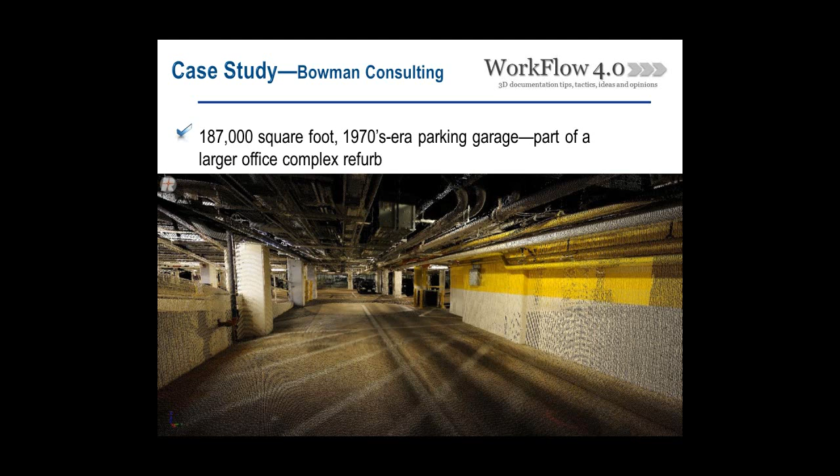Moving on to this next slide with a parking structure in particular, you'll see a project that was about 187,000 square feet, 2 levels of parking. A lot of the work here up in Northern Virginia is refurb work. Contractors and architects team together and hire folks like us to help them tie their new design to an existing condition, and with the Revit product out there, that's becoming our conventional deliverable at this point.

With this project, MEP was of prime importance as ceiling heights and ramps were going to be changed. So the quick statistics on the project: we had a couple of folks out there, 78 scans over 3 days. The Riegl VZ400 with the photography has always met our expectations time and time again. It's a durable instrument and works real nicely with these types of products like ClearEdge.

The old way we would do this, right now we're looking at that point cloud with the photos. The old way would be to bring that into a CAD application and model that piping - scan to CAD - then export that to get into Revit. We would lose all that modeling and just get the center line, and we'd end up modeling that all over again in Revit. That became particularly difficult and a budget killer when the project started off as a CAD deliverable, but then the architect in the 11th hour wanted a Revit deliverable.

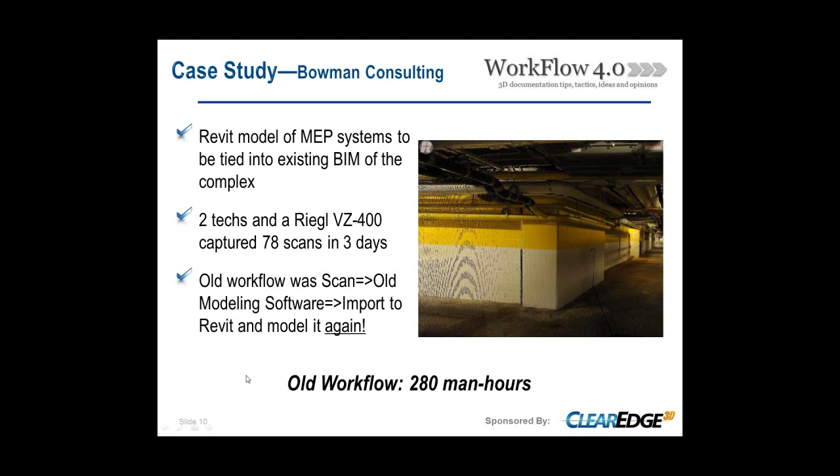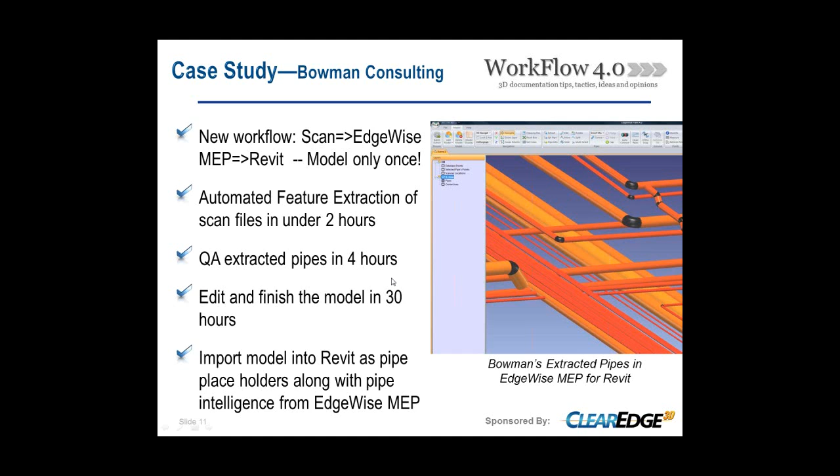So not wanting to hear the explanation that we'd have to remodel it and kill the budget, with this new ClearEdge product I couldn't be more excited about what I've seen so far on this recent project. You can see some of the statistics up there on the screen - basically we were able to import our auto-extracted pipes into Revit directly and proceed right into our final deliverable, about a six-time efficiency enhancement. I know we got a lot of ground to cover here, so I'd be happy to take questions at the end of this webinar.

Here's a quick example that shows some of the piping that was auto-extracted and modeled, and you can see it's inside Revit. It was a one-step process as opposed to a 3-step process. So again, I'm very excited about this new development, and I'd be happy to share our experiences with anybody on the call.

Hey Mike, appreciate that. The slide on screen right now kind of summarizes everything about the time savings that you all had - 42 hours in the new workflow versus 280 in the old one. That kind of says it all, doesn't it, Mike? It does, and those are real numbers. I was very happy from a budget management standpoint on this one.

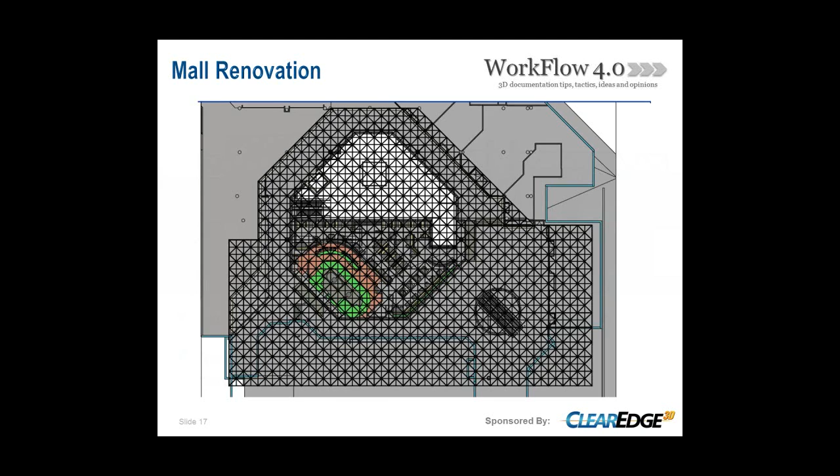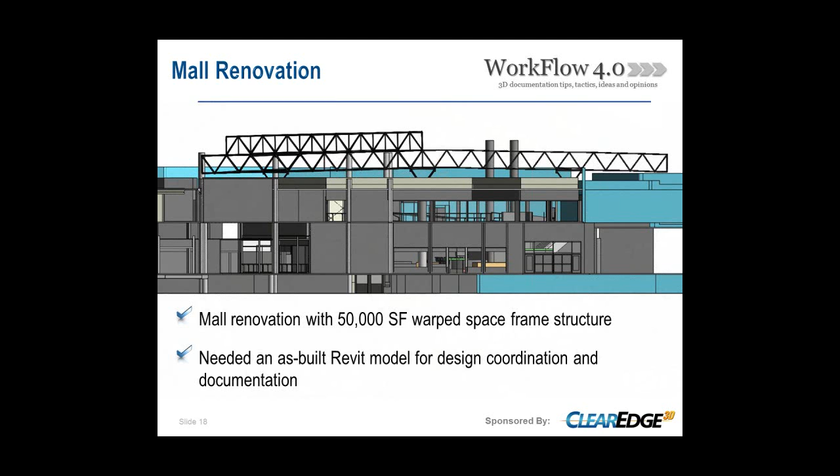All right, so this was just to run through our first pass at this, going on at the same time that I sent the PCG file to Kevin. We ran through, took about 80 man-hours to manually draw the entire space frame, and we did it using an adaptive component, which allowed us to move through much quicker than if we had used the out-of-the-box structural framing that comes with Revit. So 80 man-hours is really about as fast as it can be done in Revit.

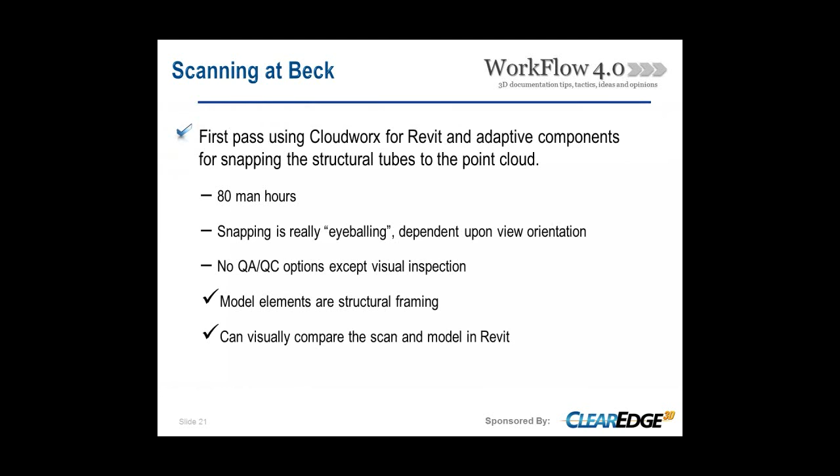There are some potential issues with this method - we're really kind of eyeballing in Revit to match it up to the scan. It's not perfect by any means, but you can see from the images we did a pretty good job of it. So there are some QA/QC potential issues with this process, but there are some upsides though. The model elements are at least structural framing category, which is good for documentation, and we can visually compare the scan and the model, which is always good for us.

The thing we're trying to work out right now, workflow-wise, is whether it's better for us to clean all that up and get everything connected in EdgeWise, or to just bring the raw export into Revit and clean everything up in Revit. I don't really have an answer right now - I think we're looking at doing it both ways and tracking hours still. But regardless of which way, we think it's going to take us roughly an additional 8 hours to complete this, and that's a pretty dramatic reduction from 80 hours for us.

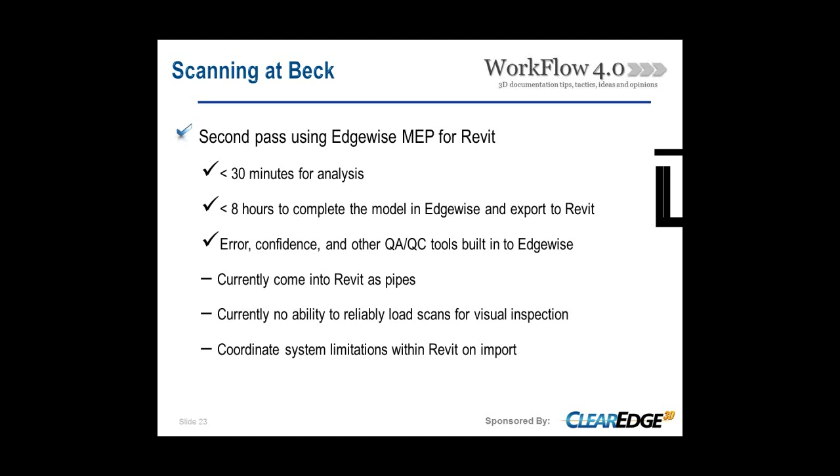And we get all the benefit of the QA/QC tools that come built into EdgeWise for MEP for all these pipes, which is something we don't get out of the Revit process. But we do have a couple things that pop up that Kevin's working on, and I'll let him talk about that in his demo. Right now, everything is coming into Revit as pipes, which is a challenge for us if we're trying to use these for analysis. And we don't really get to see the laser scan superimposed on the pipes in Revit because there are some issues with bringing them in and having them line up right now with how Revit handles coordinate systems.

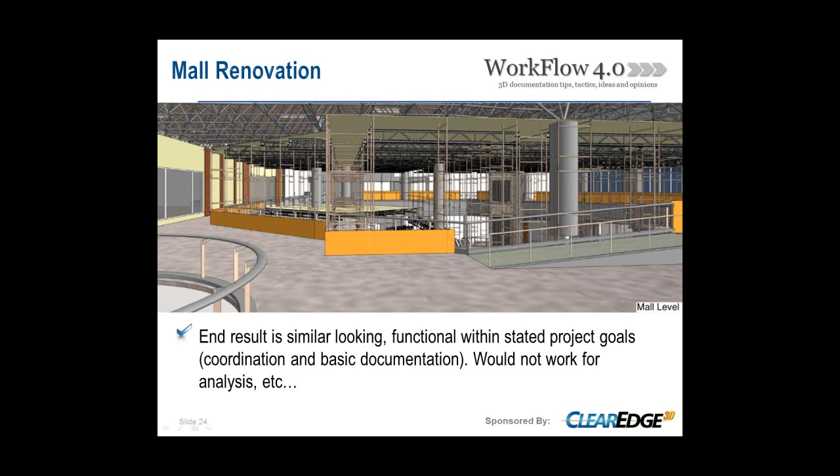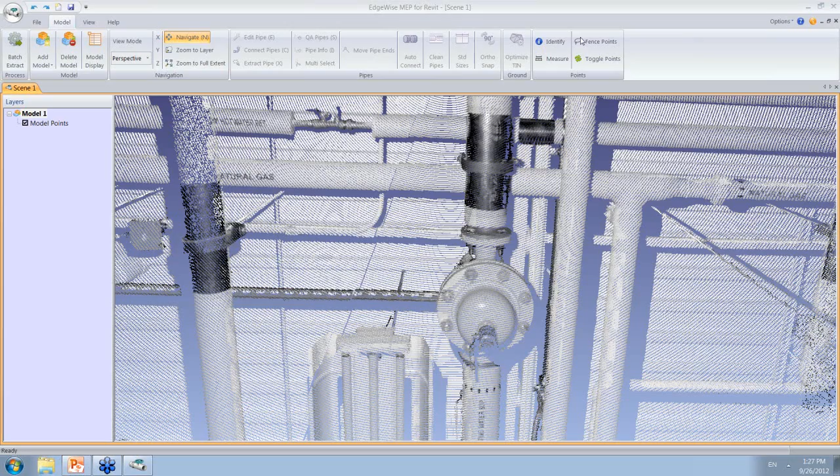Okay, excellent. I'm going to assume most of you are already somewhat familiar with how EdgeWise processes pipe models, so I'll go over the EdgeWise component fairly briefly so we can get to the Revit integration, which I think you're most interested in at this stage.

But I will give you a quick overview of how EdgeWise works. I'm inside EdgeWise right now, looking at a small single scan of a small MEP room. This will give you a good flavor for what the workflow looks like.

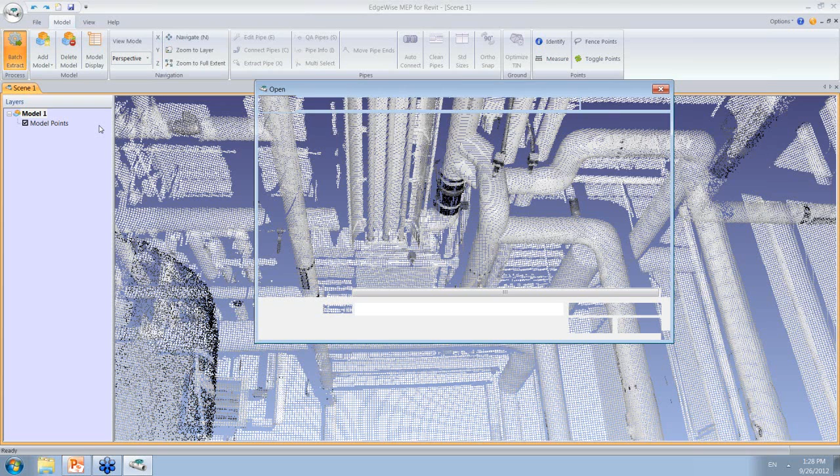The real magic of EdgeWise lies in this functionality right here. I'm going to process this scan and use automated feature extraction technology to analyze the points and find regions of cylindrically shaped clusters of points. The software will automatically detect those and extract pipes, doing a least squares best fit of a cylinder to those regions of points.

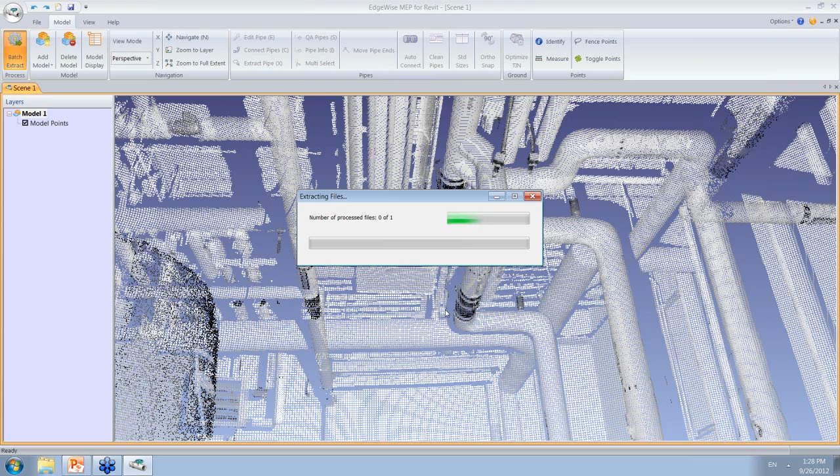So the idea behind all of our technology is we want to get the computer to do as much of the heavy lifting, the manual, tedious stuff, as possible, and let your CAD technician do what he does best, which is analyze the data and make intelligent decisions on the more complex portions of the modeling.

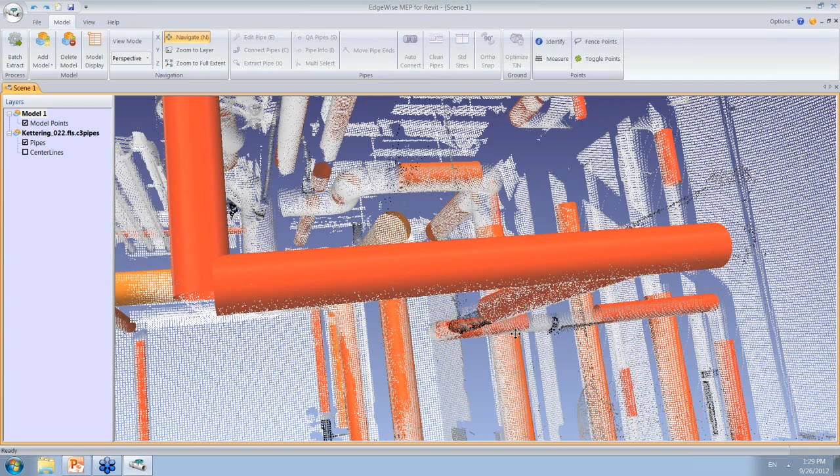So the software processed this file. Let me add in the model that it just created. All right, so these are the pipes that the software automatically detected, and you can see that it got most of the pipes, but you can find some missed regions of pipes in this data set.

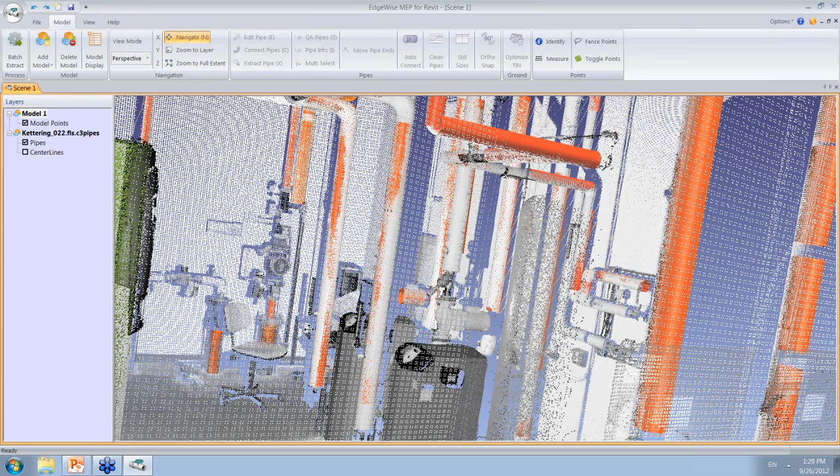Now, what we found out early on was that automation is never 100% perfect, so you've got to have an efficient way to go through and QA the data set to make sure it extracted things correctly, and make sure you don't have any bad pipes. For instance, I just found it here - I know in this data set it extracts a ladder rung as a pipe, and that's obviously incorrect.

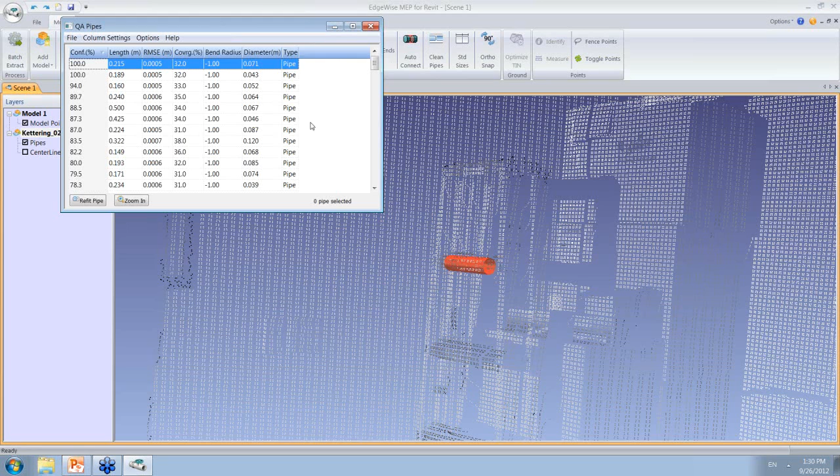So we spent a significant amount of time building a fairly sophisticated set of QA tools for analyzing these pipes, and we've incorporated them all into our EdgeWise technology here. This allows you to query each pipe - let me zoom out a little bit and turn off the point cloud so we can see more clearly what's going on.

If I query one of these pipes, it gives me a whole bunch of information. It tells me the length, the diameter of the pipe, the root mean squared error of the fit, the amount of coverage of the point cloud around that pipe. So it tells me a lot of information about that pipe.

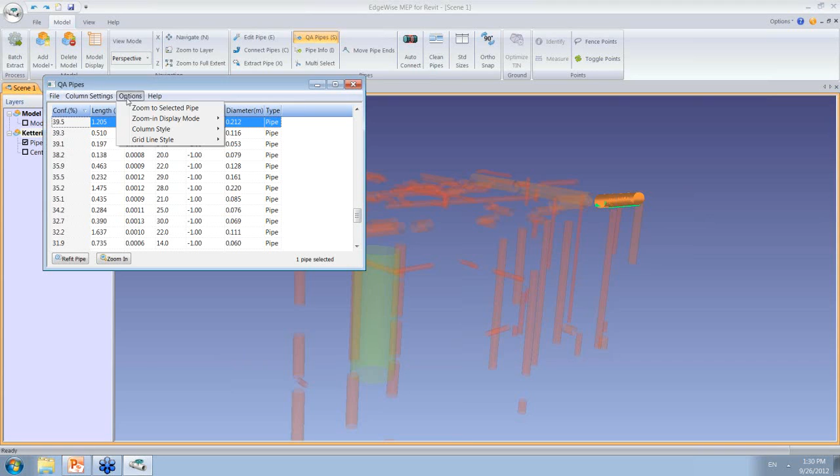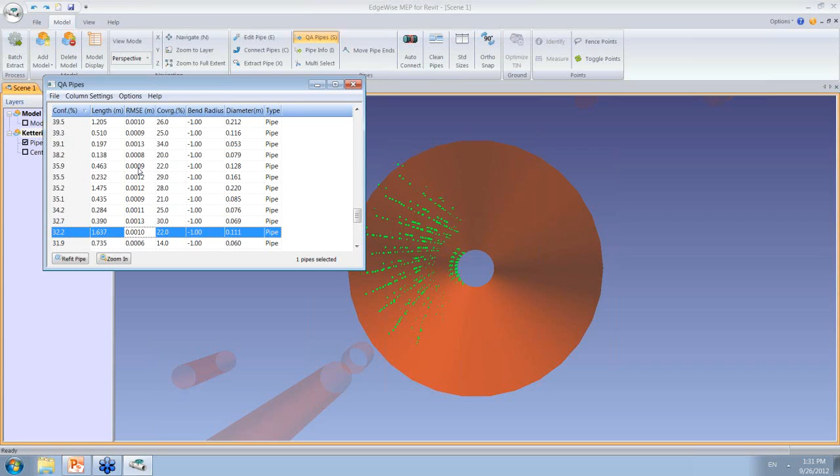Additionally, if I turn on the inspection mode, I can click on each of these lines in the spreadsheet and it will jump me to each of these pipes individually. If I rotate around, you can see the points that were used to fit that pipe, and it'll jump me to the next pipe. You can just cycle through on your keyboard and within a couple minutes verify each of the pipes in your data set so you can make sure you're working with accurate data.

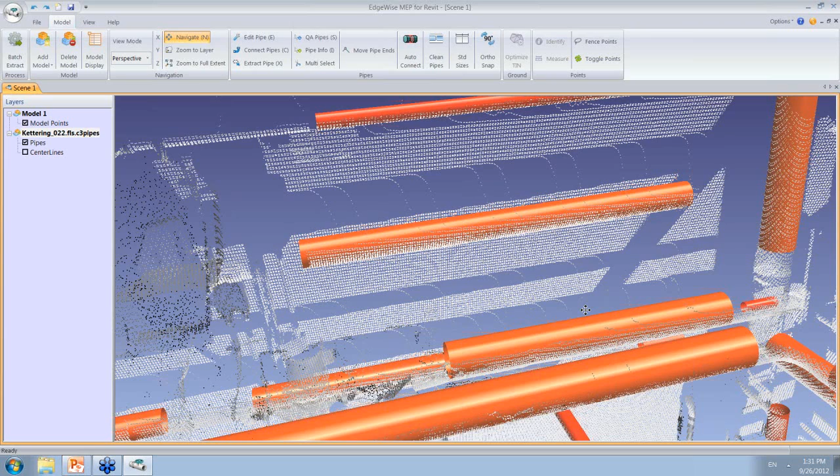All right, the next step in making a complete pipe model is capturing any missed pipes from the automated extraction process. Again, we've really refined the tools to enable you to go through and do this quickly and easily.

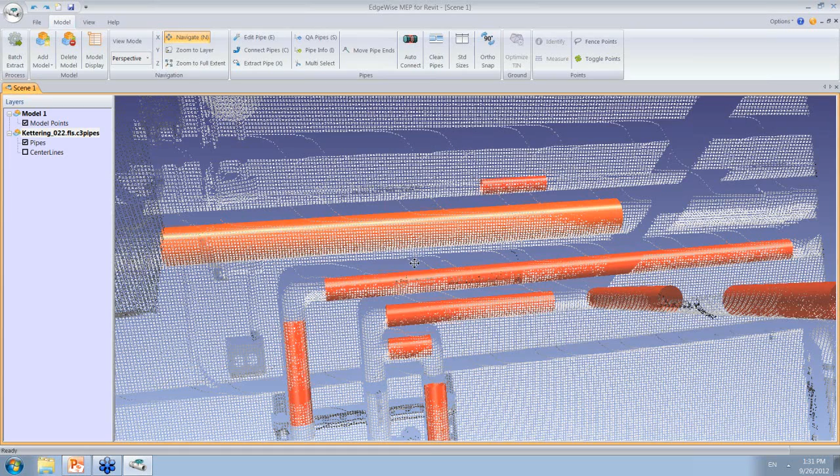So we have some really fast and easy tools to allow you to select a portion of points that should belong to a pipe and extract them. You don't have to go through and clean up the point cloud to make sure you're just selecting the correct points that fall on the pipe. You can just visually, very quickly, go through and grab the points that you see, and it will make a pipe.

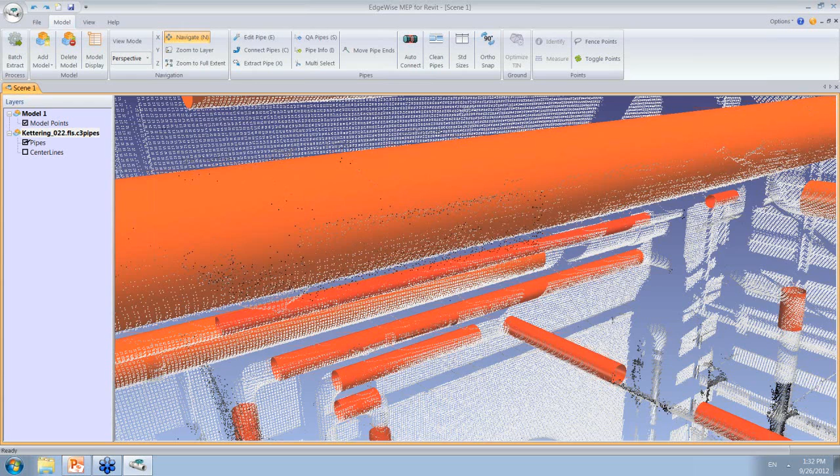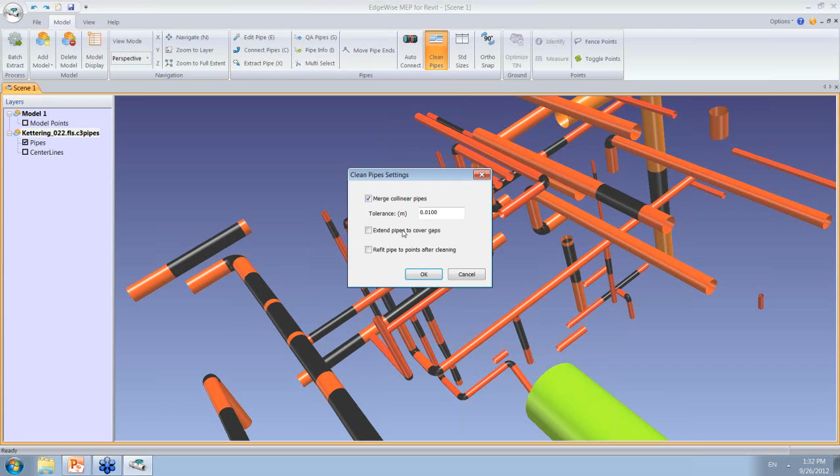So that's the workflow. Once you're satisfied that you've got most of the pipes, you can next do an auto connection routine. I'm going to adjust this so it only gets the most confident connections. You can see all the black pipes are the pipes that the software automatically connected through void regions in the point cloud. Finally, we can clean the pipes, which merges the black and orange sections of pipes together.

And now the most important part for the MEP is this big purple R button here that allows you to open the model in Revit. I'm going to export it right now as pipes and elbows, and the software is just going to launch Revit and interface directly with it to bring that model into a new project.

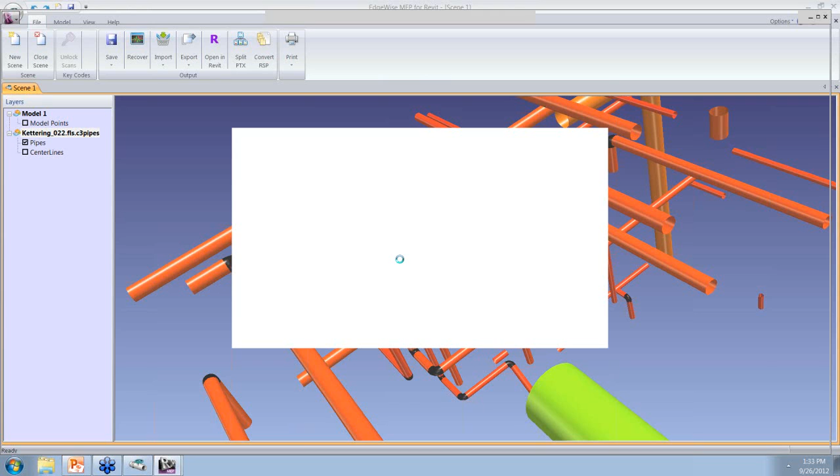So it's creating pipes, and it'll go through and create the elbows. And this is a new error message that started popping up on my machine just this morning. It doesn't seem to affect the display at all, but I got to talk to Kyle about getting rid of that.

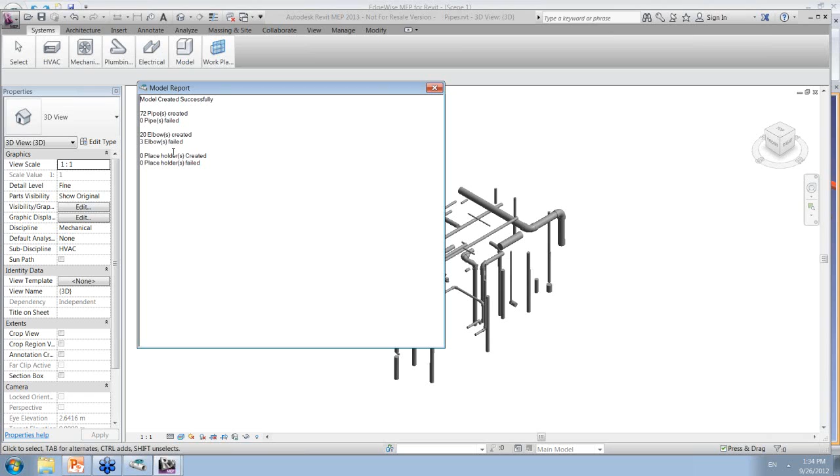Here's the report that comes through when you push the data over into Revit. You can see that we created 72 pipes successfully, 20 elbows, 3 of them failed. We're finding that typically about 20-25% of our elbows are failing right now. We're working on it, hopefully we'll get that number down to where we're extracting 99% completely.

Let's take a look at this model that I just brought in. If I navigate around, we've got all our pipes. They are true Revit objects. Now if I click on one of these, you can see it's a PVC pipe. It tells the reference level, the phase that it was created, all the diameter information, everything comes straight across directly into Revit, and it's a fully functioning Revit object now. Let me do one last thing

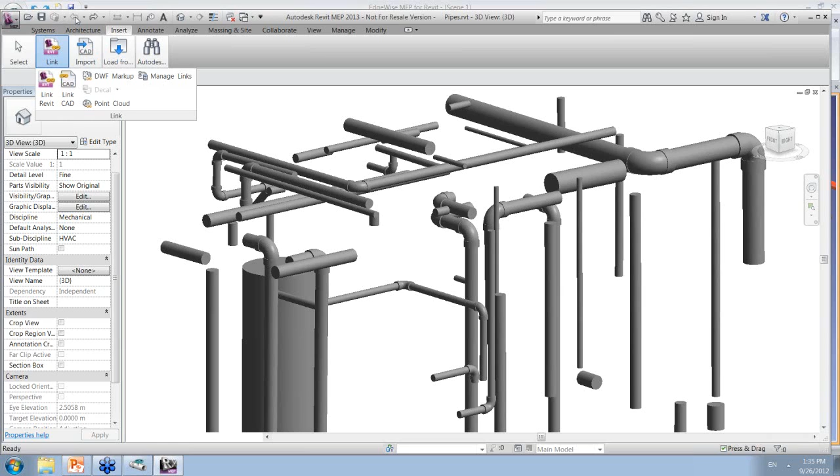and bring in the point cloud. I forgot to change it to origin, so let me undo that. It's very important, if you want them to line up, that you keep it origin to origin. There we go. So now we can see the point cloud and how it lines up with the pipe data.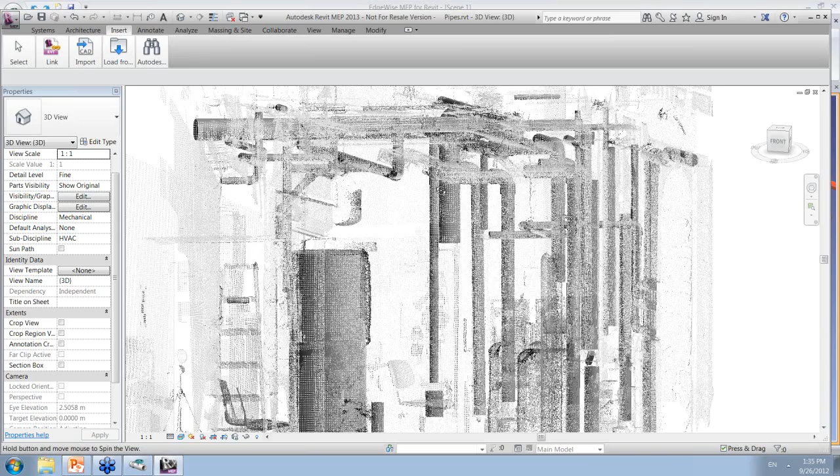So that's the workflow now with EdgeWise MEP for Revit. Let me show you one last thing before I get off, and let me show you the placeholder capability.

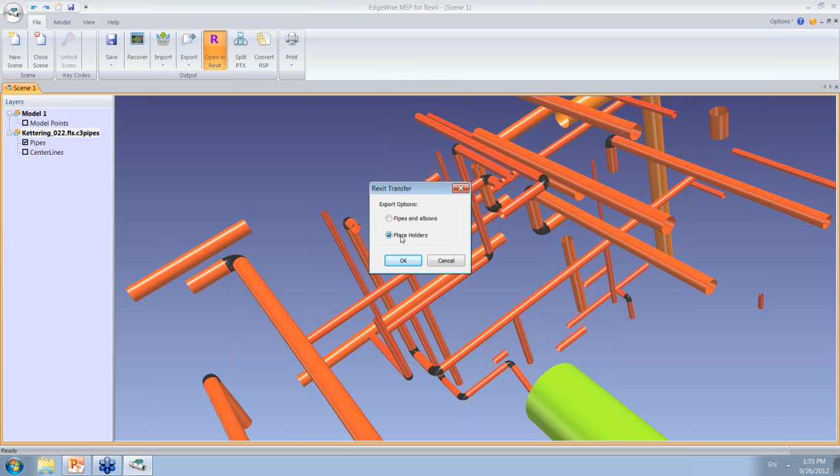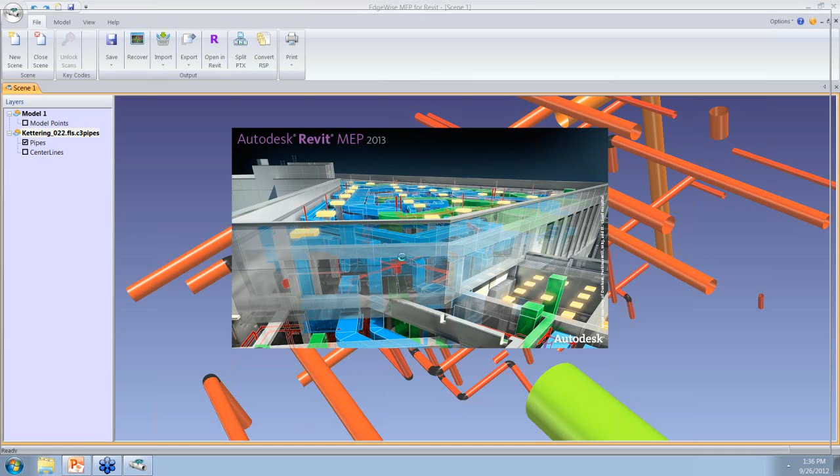So Revit has this really cool functionality. It's not working 100% right now, but it will be in the next week from EdgeWise. It's occasionally a little quirky, but it's a great technology that Kyle can tell you a little more about. If you haven't worked with placeholders before, it allows you to work with data on a much more conceptual level before fully rendering it and applying all the attributes. So it's a very flexible format to work with.

And I think here's my error message again. Oh, there's a do not show again option. I should have clicked that.

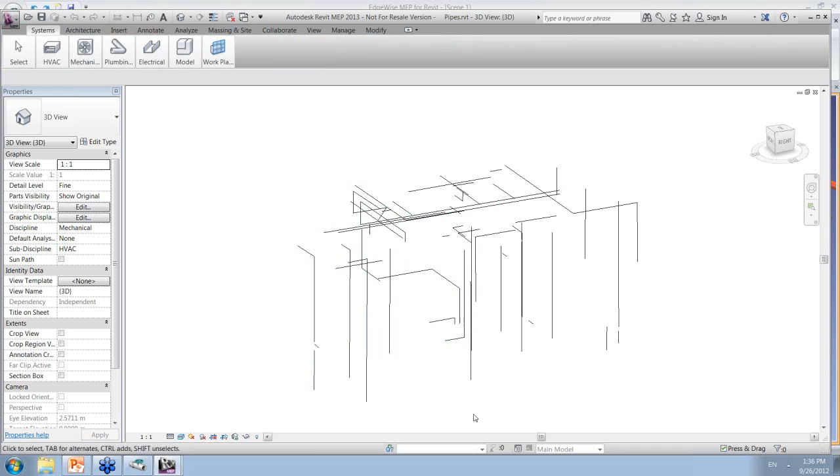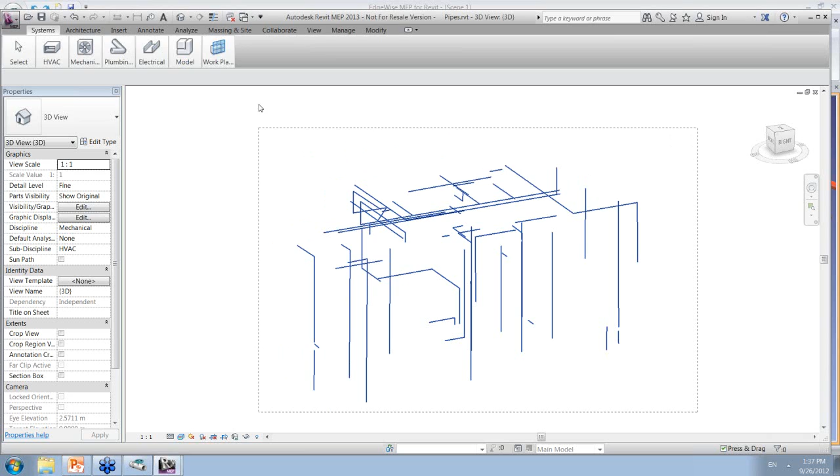All right, here's the placeholders, and the advantage is they're very flexible at this stage. We can go through and let me select a set of them, and we can change the level associated with those, and then after we've edited these placeholders, we can convert them. Let me deselect that, and select them all. This will go through and convert all of these center lines with their attribute information into actual pipe objects within Revit.

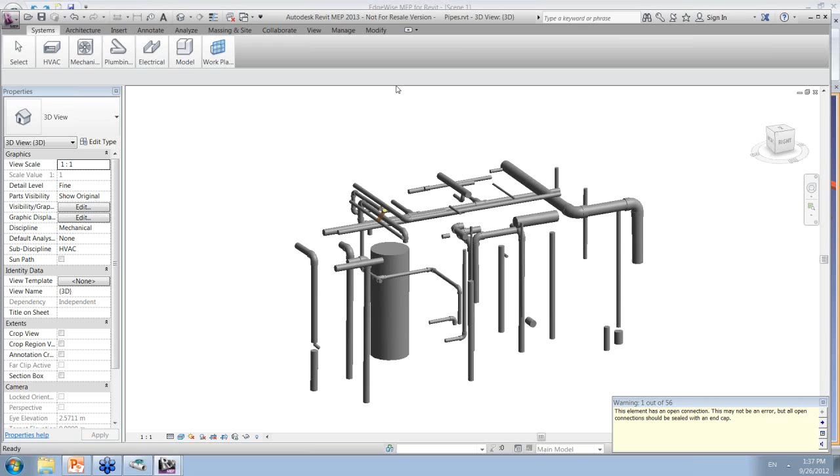So there's the pipe model using the placeholder functionality.

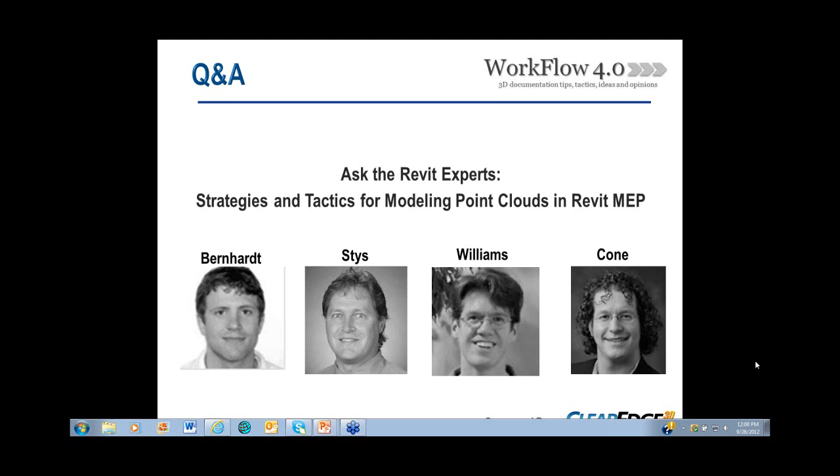Millimeters. It completely depends on the data set, but there are a couple of factors to look at. The fit to the points is always the mathematically optimal fit to the points, but occasionally it will choose the wrong points. So it will either be dead on or it will be a blunder, and we see blunder rates anywhere from 1 up to 10%, depending on the quality of the scan data and the complexity of the scene.

Usually somewhere around 2 to 3% range are the blunders, but the ones that it gets correct are dead on.

Hey, great. Kevin, can I follow up on that? Sure. It has a lot to do with our experience with the tool, and also being one of the beta testers for version 3. It has a whole lot to do with the density of the scan. A lot of our scans for architectural space are still done using time-of-flight scanners, and we generally find we get much better results from phase-based scanners just because of the point density. So if you're anticipating using these tools, it impacts which scanner you'd ask your scanning provider to use or select. I don't know if Kevin can explain more.